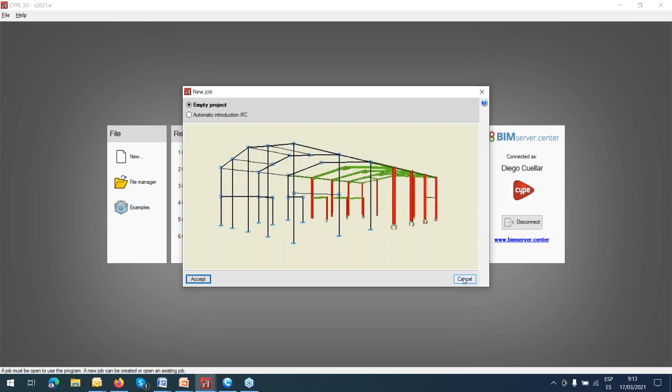Well, you can start with the empty example, or if you have any IFC files, you can start with that. I'm going to do it with the empty example. This part I'll talk about later. Accept it. Okay, so from now on, you're going to work in the 3D environment.

But the first thing is, if you want to introduce a node, for example a new one, the cursor checks everything, any connections, any cross section. You can click here, and now you'll see one little node here. That point, the numbers go by default.

And for the next ones, if I want something on top, you have this extension that lets you create the height of the second node in the z direction. And every node has two conditions: external fixity and internal fixity.

External means that it's supposed, in the near future, to have something connected with the soil. So that connection could be one of these options. In this case, I'm going to introduce fixity one.

That means that displacements are fixed in x and y and z. Also the rotations are fixed. There are several options, but for this case I'm going to continue with this selection. So that's the way we right away understand that this is the fixed connection. And the one on top, if you click on top, you displace it.

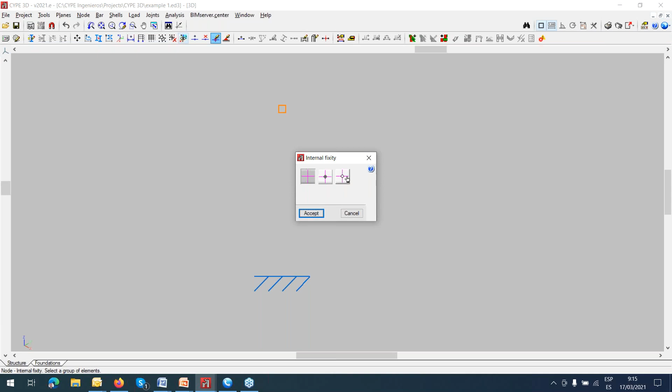And internal fixity is another joint on top, and that one on top also has different connections. It could be the fixed one, could be the fixed node with partial fixity, or maybe one that you can create on your own. So that's it, it's a fixed node on top.

The second part is just to introduce any bar you want, a new one. From this place, you can create a new bar. By default, the program displays this kind of bar, and then we have several options here. We can start with the generic ones.

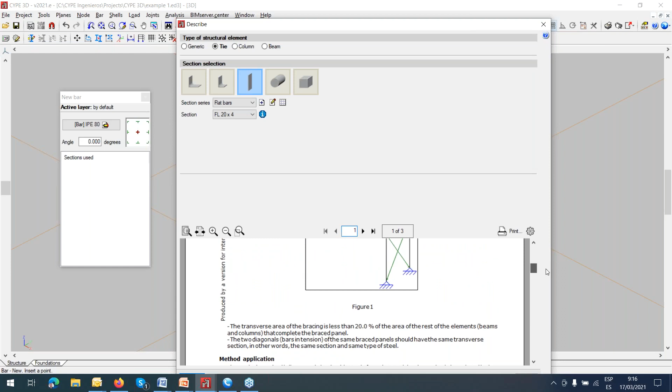If perhaps you want to need the tie, select this. Later on, if you need more information about this particular way of solving the problems, you get this extra information. Also, this kind of bar has to be working in tension, it's not allowed to work otherwise. If the bar is able to work in tension always, that means the structure has a solution.

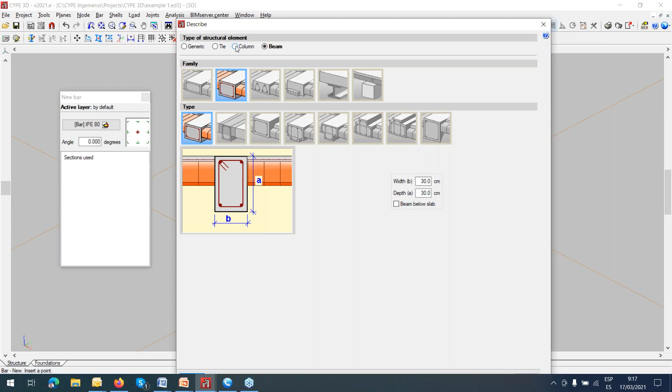And also the last two buttons, the columns and beams - recently, a few years ago, we started working in 3D with columns and beams in concrete. You can also work with different combinations, not only the metallic ones - you can introduce timber, aluminium, or concrete structures as well.

What is the difference? Sometimes people ask me what is the difference between these concrete ones and the last two. In these generic ones, the concrete columns or concrete bars don't show the reinforcements. But with the column and beam option, once you define the analysis and finish it, you will get that information.

So suppose we want to continue with this kind of rolled steel sections. Over here in this grid, you have other options - there are some factories that give us extra information regarding all the products they offer, and they post it here in the program. Some of them are from Spain, some from America.

Depending on who is watching this conference, in the future if you have any factory information and the full details, you can send it to us and we can introduce it here.

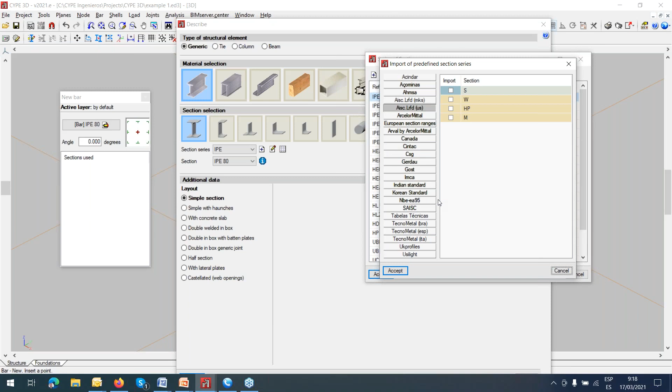Continue with this - you just choose one of them, accept it, and you will display that option later. Once you are working, you may find something not here, maybe in the next profile - for example, that one shows something in red. That red mark means this profile is not available for you, but it doesn't mean you cannot introduce it.

In this section, you can also develop any other profiles that you already have in your local town, and introduce them here by hand. Okay, so this is it.

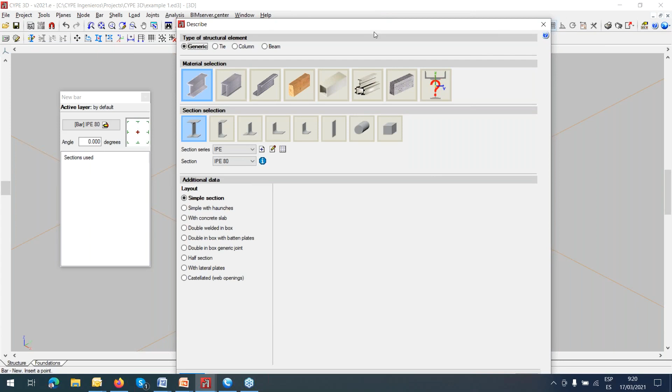So I'm going to introduce the first one, this kind of profile, the IPE. Accept it. This is in case you want to check the fire resistance.

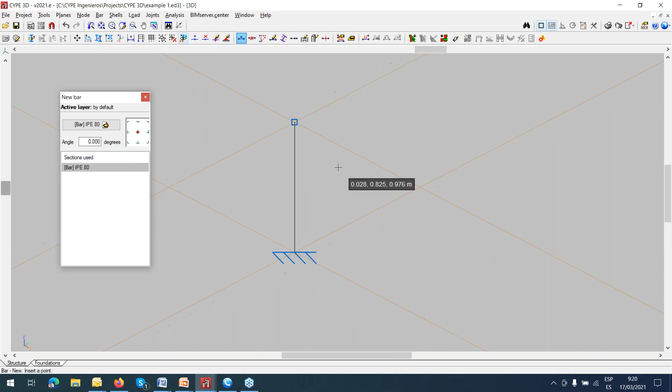Then you can click from here up to here, and now you have the beam, right? So the first thing you're going to display is this over here. On this side, you have the global reference - the global reference is different from the local reference. If you click here...

Later, if you want to display the bar, for example to describe the bar, you'll see that the reference is completely different. So you should know this from the beginning, because now I'm going to show you the forces or load case scenarios that we can introduce in the bar.

We can introduce the joint - you can introduce any force in any joints, on top and the bottom. You can introduce several options, and once you define these options, you have to make a reference - it could be the global reference or a particular reference like this one.

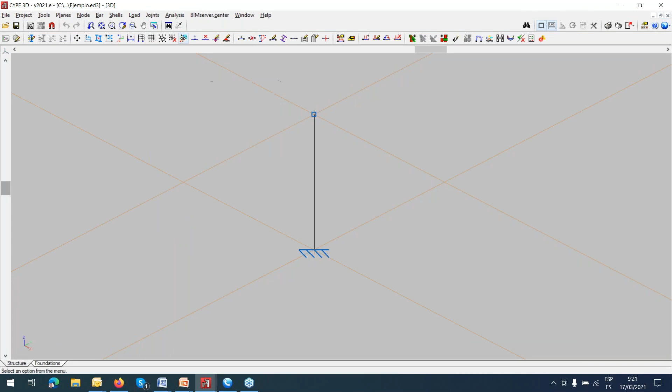Let me show you the examples because I already had one. So we have now the load case scenarios. I'm going to display all of them. We have several cases - the self weight, Q1, Q2, Q3, and Q4. If I select view all, we get this, right?

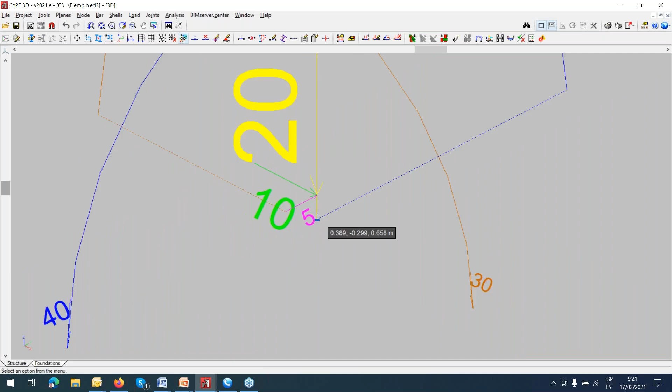Okay, now the scale isn't good enough, maybe it's too high. Now go back to the load - you can modify the scales. Maybe here we can introduce 0.1, 0.1 everywhere.

Let me check. 0.1. I'm going to reduce the scale a little bit. Accept it. Now it's okay. We're getting better.

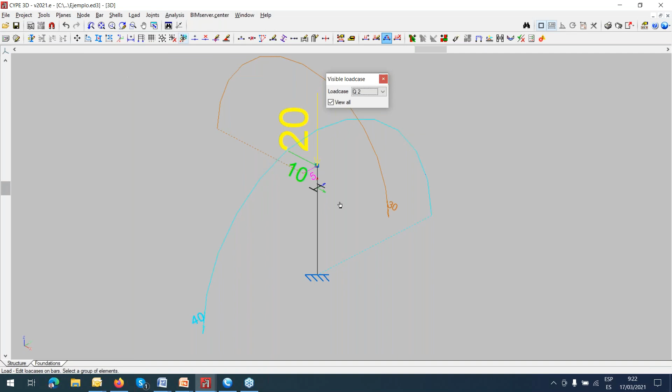So now, just to show you how to introduce the loads in the bar, just click in the bar. You can display all of them. So if we go back, for example, to edit the forces on the bar, if I click here...

If I click, for example, the self one. I'm sorry, I made a mistake. Let me fix it, please.

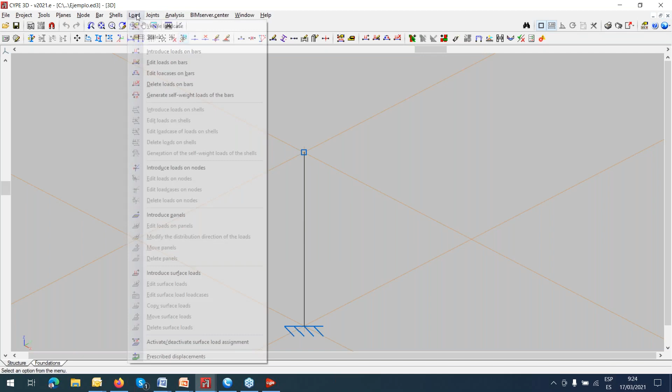Okay, that one. So we go back to the loads, edit the load case of the bar.

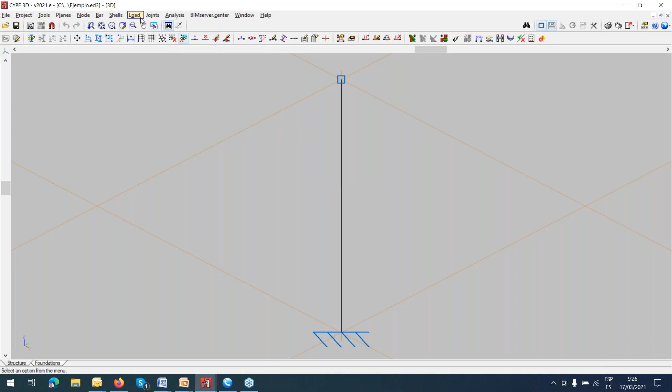Oh my goodness, sorry. I'm sorry, guys. Okay, going back to what we started. So I'm going to edit the load cases. And perhaps what I need is to... oh my goodness, why? It's another example, no, Diego? If it's giving you an error and all that. No, I don't know why it's showing this. Maybe you are using another standard, no? I mean, don't open all the time the same one if it doesn't work. No, I need to show that once and all. Let me finish. All right.

So we have several options here, each of them different. Suppose this option, for example, if I click in the load case, you will have a force for Q1, for example, in a different location.

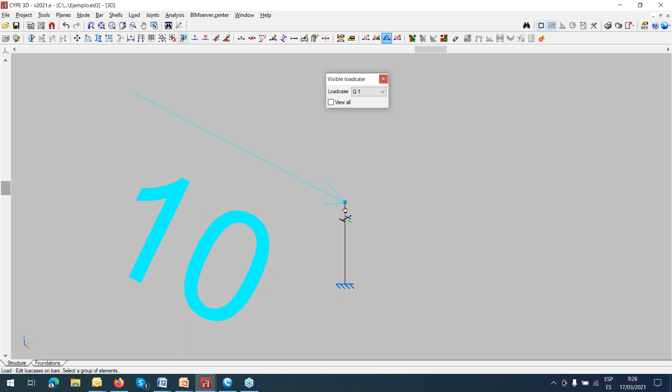I'm introducing a force on top of the node of about 10 tons. The Q number 2 is about 5 tons. Case 3 is a moment, a flexion in the Y direction. And Q4 is another moment, but in this case it's a relative location, in the bottom of the column.

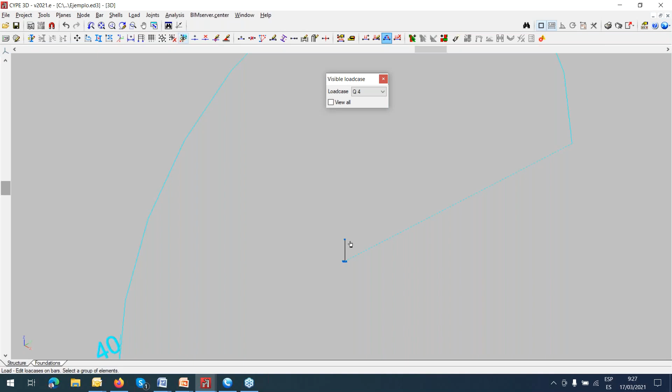Now I'm going to show you how to introduce this hypothesis in the program. So we go for general information, back to the additional load cases. Before that, I need to create that information in the software.

So we go for the live load. I did it for Q 1, Q 2, and Q 4. If I display everyone, you have extra information regarding that. If you need it, you just display that here. And also on the bottom, you have the combination. That combination, I can show you the combinations we are doing. So that's the combinations, and accept it.

Not only that, but every load we are creating here, you can do it with wind, any condition in wind, also for earthquakes, and also for snow, soil pressure, any accidental force. But the basic ones are the self weight, the dead load, and live load as well. In this case, I'm introducing the live load case scenario.

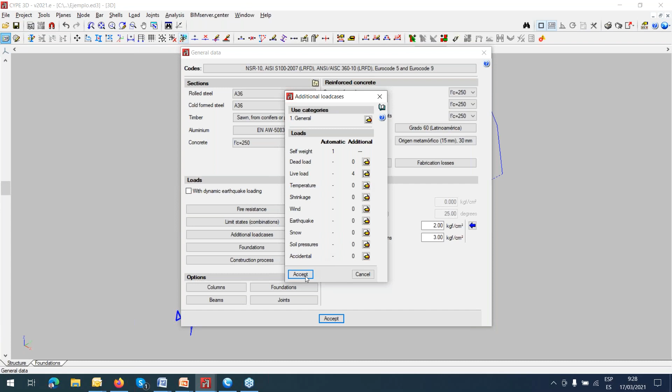Now I'm going to show you another project. Let me see. A simple beam. In a simple beam, we already have the analysis. When you display the analysis and you have color here in the icons, it means the analysis is done.

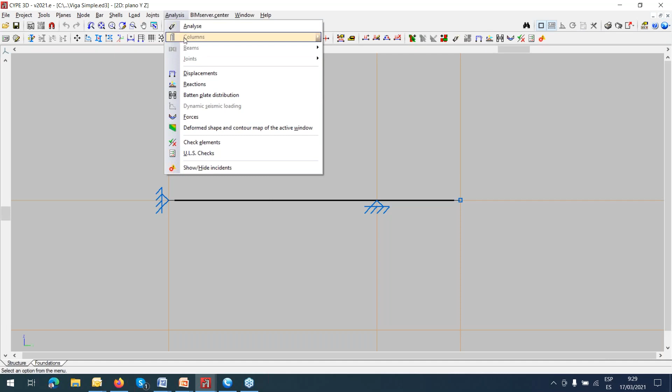The first thing I want to see is the loads. I'm going to show the visible ones, or show you all of them, and also the loads, and you can edit, for example, Q 1, the self weight, dead load, and another case. Any of them, you right click your mouse, and you can display the load descriptions.

This is a point load. That one is the uniform load that we're using right now. That's the applied moment. Also, we can apply an increase of temperature. The last one is an increase in variable temperature.

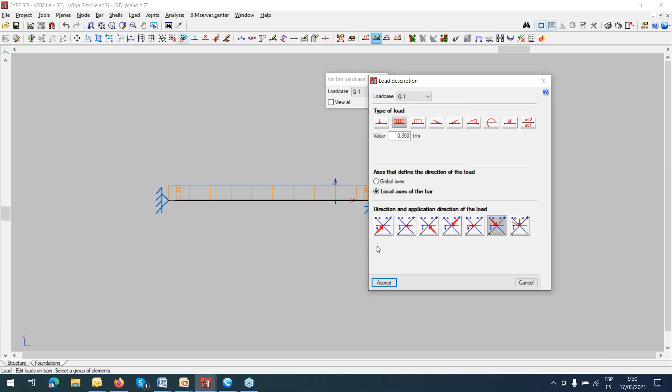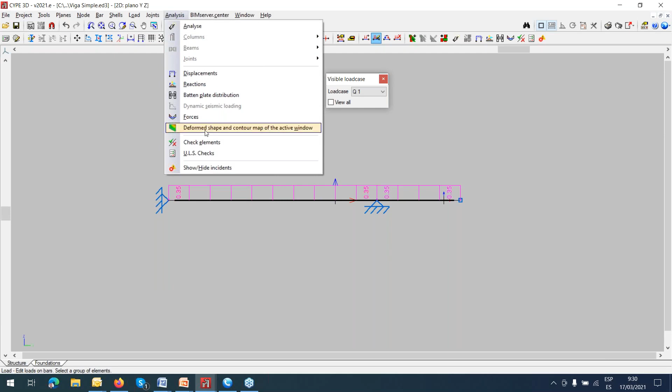So when this is done, I can create, for example, the state limits of the bar. You click, and you can check everywhere according to the resistance. As you know, the solicitations are the reactions, the shears, and the bending. And about the deformations, we have the torsion or twist, the elastic deformations, and the maximum deformations.

This check gives you details here one by one. The only thing that's not here is the deflection. I'll show you later about that kind of deflection.

Over here at the top right, you have the full report regarding that beam. You can go around, check any normative. I will show you later about the normative.

And also, for the second analysis, you can visualize the deformation of the bar. I'm going to introduce the profile, turn it around a little bit, and increase the scale by 500.

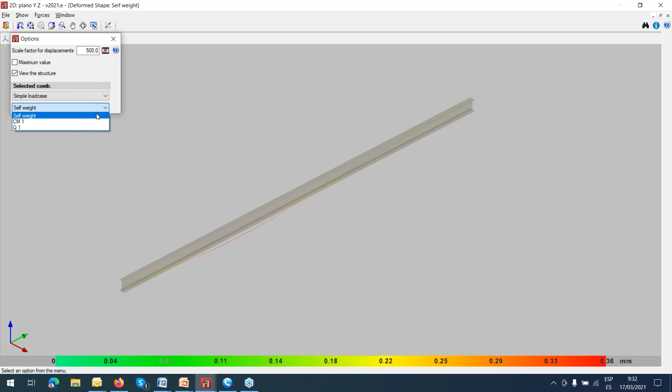Now on the bottom, you can select the combinations: could be the simple loadcases, the displacements, and that's all. The other ones are for different elements, but the simple case could be the self weight or dead load, and also the live load. If you want to see really how the structure is moving, click here and you will see it right away. If everything is okay, this is one way to check if the structure behaves the way we are expecting, so that's a good reference first.

Then, for example, going to check for the displacements. For the displacement, we have several combinations. In this case, we have several combinations, and I'll show you for this combination what we have. It's something like that.

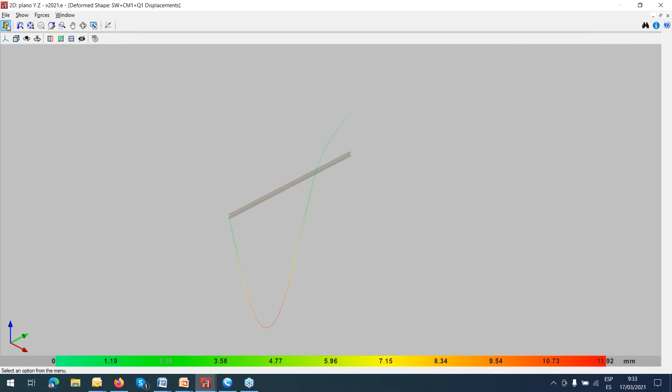Beside that, we go back to the profile. Remember that I was talking about the bar, and there is something called the buckling, the lateral buckling. Lateral buckling could be for this side or the other one. In this case, the lateral buckling for this one is selected this way, but remember that for the upper flange, you must choose this distance LB, and also the spacing.

If this bar is located in the rafter of the warehouse, you must be aware of the distance between the purlins, and that distance is tricky to introduce. For example, if the rafter is 1.5 meters on top, it's better to introduce that distance because that's the restriction. This is a very key option that you must understand right away, especially when doing a warehouse and you want to check the structure properly. If you don't do so, perhaps the structure is going to be over designed and also not cost effective.

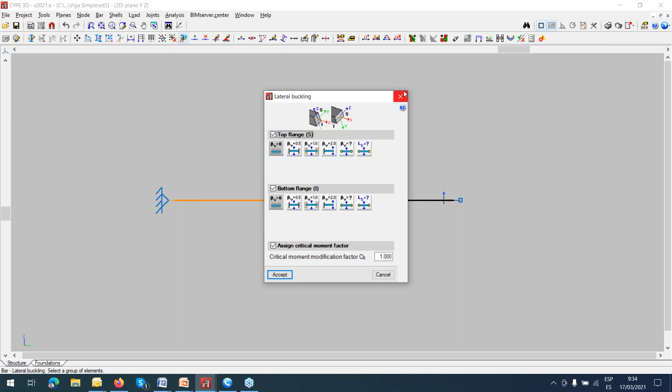Beside that, we have the bar and also the limiting definitions. For example, in this case, you must understand the deflection: suppose if the beam is not very slender, it doesn't comply by deflection.

We must set up these things right away. That's the limit deflection that doesn't show in the check document that I showed you before, because this is separate. You gotta understand that if you display this, you have some default numbers, but the relative maximum deflection goes by the normative, and you must check the normative.

As an example, if you choose L divided by 500, it means you are using very poor, low quality partition walls, but if you go for L over 400, it means you are using poor walls, something like that. The quality of the elements you are going to use comes exactly from the code or code reference. Normally this limit, the relative maximum deflection, goes between L over 250 or L over 300, more or less. Okay, that's the maximum deflection.

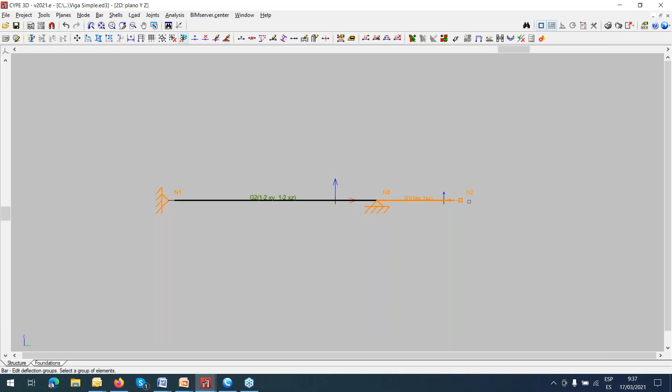Now I'm going to edit the group, for example. In this group, in this site, from this point N1 and N2, you have the sequence. For the last one, which is free at the top, the last part, this is a tangent. The definition is a tangent, and the reference is point number one. Point number one is this one. Okay, you gotta be careful with this.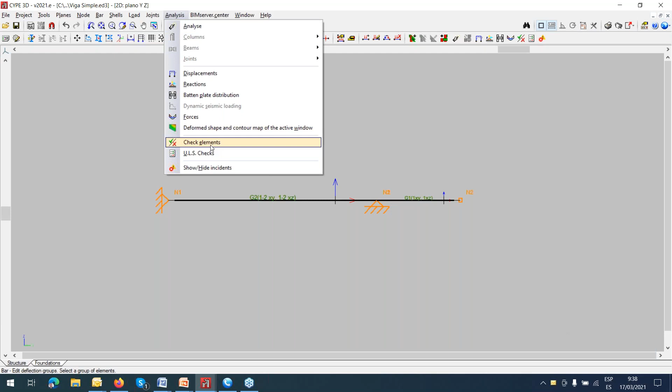So once you run the analysis about this small beam, you can check also the element. Click here, we already did that. Now for the analysis, we go for the check element.

Click here, and it will display exactly where you are. So we are using the IPE 180, but you can get it all lower. That means that according to the load case scenario it's okay, more than okay, but also on the right side you have the percentage of use. You've got to be careful about the weight. If you want to save money in the company, you must go for the lower one maybe, and you will be safe. The same thing for the other bar.

All right, so now we go for another example. Maybe I'm missing something. Now we go for forces.

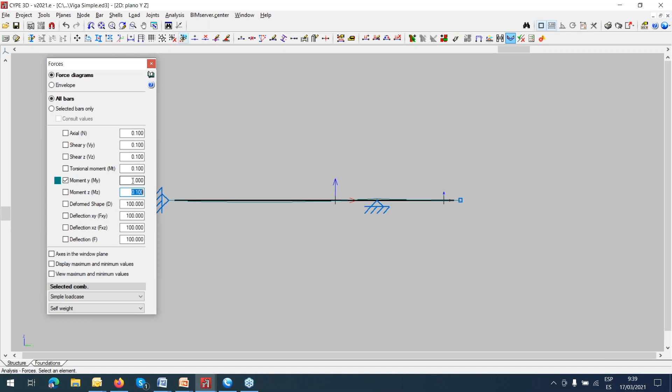Here, you can see, just to show you here, this part - not in here, maybe the scale is not good. Maybe I'm going to increase maybe one, maybe 10. Okay, good. So now you can see the deformation.

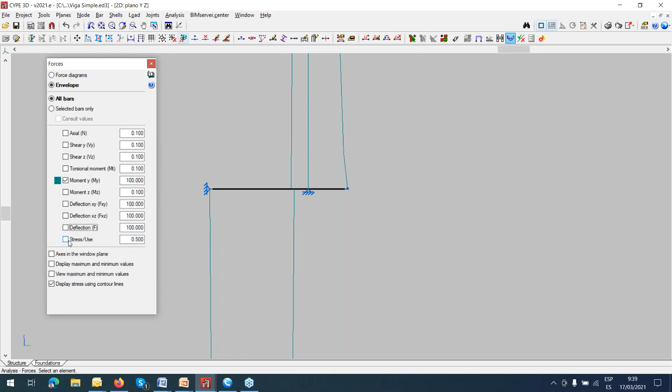You want to do the deflections over here. If you want to check the overload, now you have the deflections. You have the stress, which I have mentioned before.

Now, if you apply the second law, any force that you are applying in any element, if that element has a mass, you are also creating an acceleration or inertia in that structure. What the reaction means is the tension that you are creating in that bar. So that's the way to see or check that tension in the bar.

Okay, I think this is it. We can go back to the analysis.

Now maybe you might need the reactions in the bar. Click on one of them and you will see the displacements and information regarding that knot, the second knot. The last one is not okay because it's not supported by any external fixity. In this case we are using knot number one with external fixity, and at the second point we are using external fixity in the bar, and from all of them we have different cases.

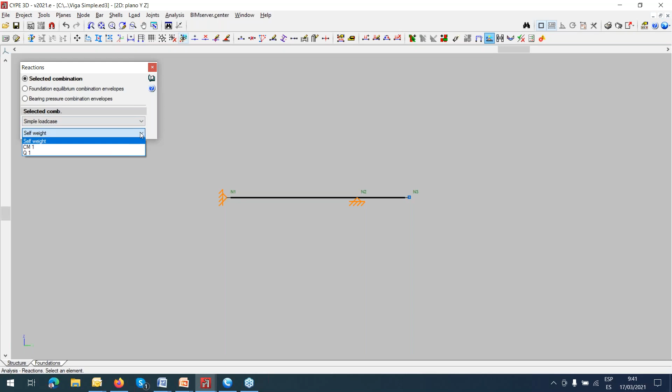For the self weight, also for the dead load, you see we are having some numbers here in the reaction in zeta, and also for the live load, creating a different environment. That's the way to check it.

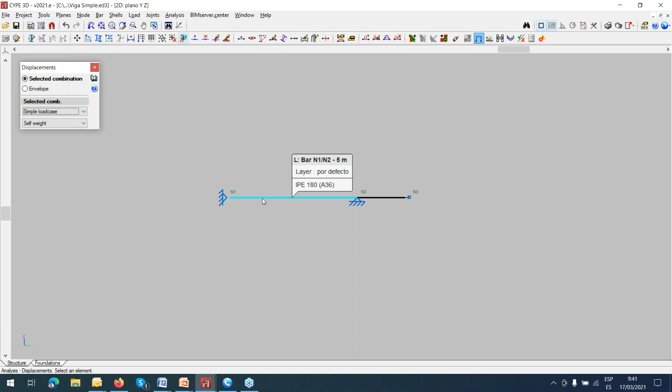And now in the analysis we can display also the displacements if we have that kind of displacement. The same thing here, and for the overload, which is going to be more important.

Now I want to show you another example, which is the buckling. Okay, for the buckling...

We go here to bar and check the buckling. I'm going to check the buckling here. So about the buckling, it's almost the same. You can work with these coefficients. As you know, the formula is L equals beta...

by the distance. But you can use the beta, the simple one, but you must also check the coactions. Depending on the coaction, you can use the beta. If it's not the case, you can introduce the length. With the length, you can start doing the analysis.

Sometimes when you are working in a warehouse, one of the laterals of the warehouse is going to be supported by different elements - could be more than one element, one column, more than one column - but in between columns you can start working with walls.

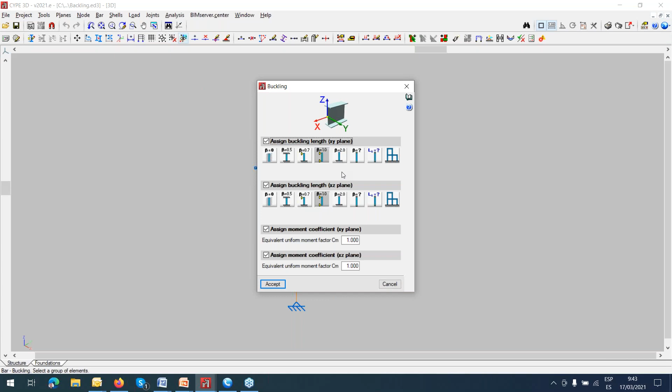Those walls - the way to recreate that wall is when you are using the right buckling. You don't need to start introducing that wall in the software, but using this information properly, you are recreating that restriction in that direction. Okay, I think this is it.

Well, the same thing - the load case for this particular structure, we have several ones. We have three cases: one load in that area, one load in the center at this point, and one load a little farther from this.

So you can study what's going on with one of them, and this software is usually helpful if you are a professor at the university level. Could be nice for you to use it and try to recreate different scenarios.

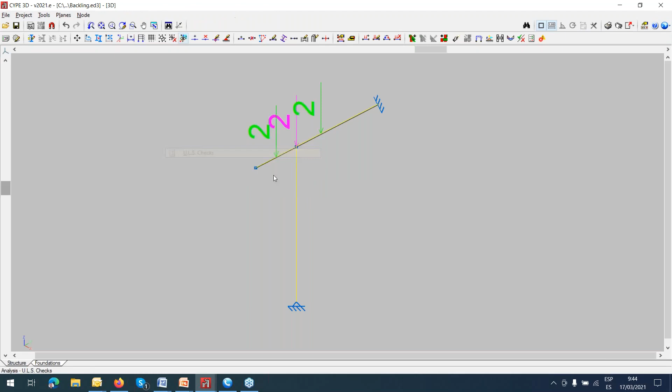So the analysis is the same thing. You can check any bar, and you will see the code check depending on the code. Now we are using the Eurocode. In this case, you're watching the Eurocode, but any combinations, any solicitation, any deformation that we might have, you can check if everything is okay. If it's not okay, you will have it marked in red or in a different color than green, and you can check the reference, go to the article, read more about the problem, and perhaps with this extra information, you can go back and do modifications to the structure.

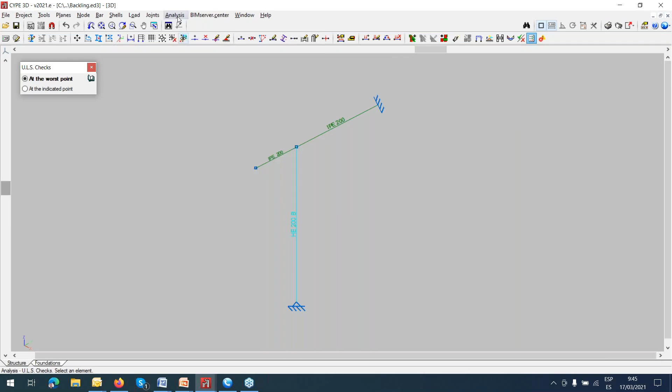I'm going to show you the deformation, for example by the P2, P1, which is more important. No, it doesn't. Let me show you more. I'm going to increase this value, 200 perhaps. Yeah, 200 is okay, so perhaps you can see it properly.

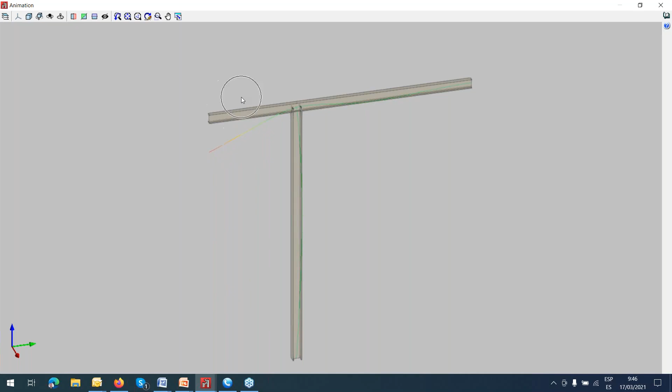I'm just checking what is happening with this P1 load. P1 load is in this bar over here, affecting the structure this way. I'm going to show you the second point, P2. Nothing happened here, because it's over here. The P2 is affecting this part.

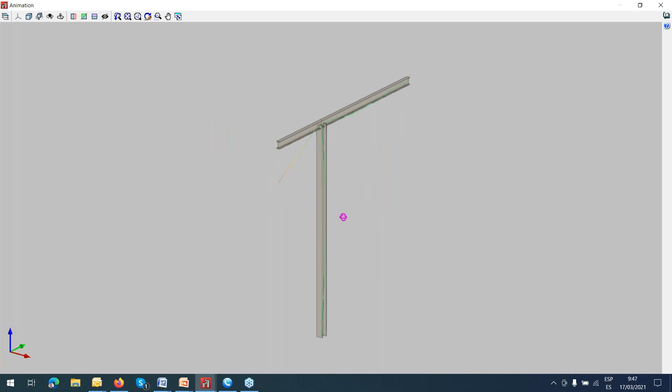And the last one, which is P3, affects it a little bit, not too much. So I think the worst case scenario is the one on the corner, and that's why we can see the deflection right away. Also, you can do it by displacements, and you have different hypotheses here. Now we can see the deformation shape, which is really important to check how the structure behaves.

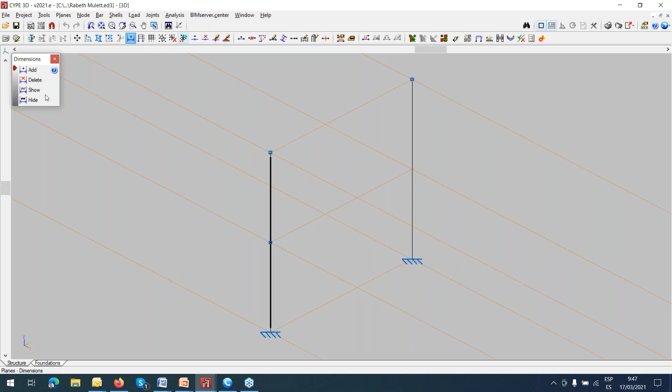Okay, now we go back here to a different case. All right, so I want to show you first the plane, the dimensions of that structure, which is like this, it's 6 meters. It's the same profile, but we have something different here, which is the knot in the middle.

That knot in the middle creates different behavior in the structure. So if you go for the loads, for the analysis, I'm going to show first the bar buckling. This is my option right now, according to the reactions on both sides, in the XY plane and also in the X-zeta plane. This is the option in this case. But in the second bar, even though it's the same profile, the buckling I'm choosing is different, and the solutions are different as well.

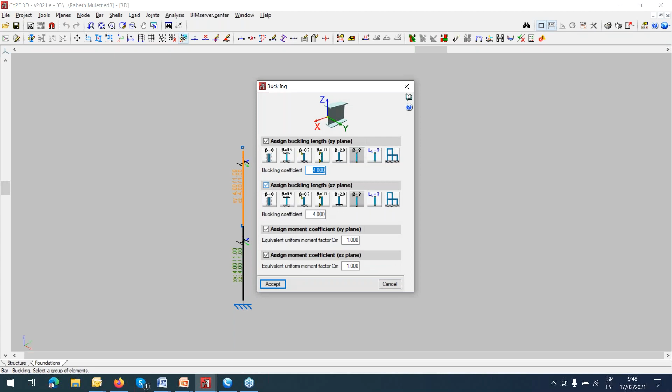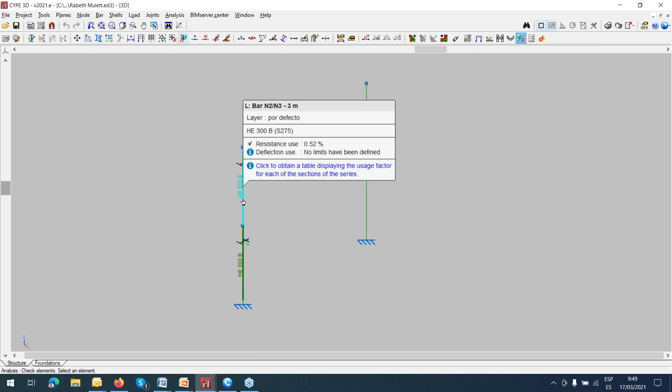Now I'm going to show you the check element. Look, the difference in the code checks is like this: the resistance is going to be 1.01%, which is the percentage for use. But for the second piece, we get different results. At the bottom, it's almost the same, but the weight changed a lot. And on top, even with the same element, the resistance or percentage of weight changes a lot. So it's very important to define properly that buckling coefficient.

So now we go to the tower. This is an electrical tower. Sometimes it's better... right now I'm working with an astronomical observatory, and I finished it recently. I did it with this program, CYPE 3D. I'm not using a different program, just CYPE 3D, and it's really complex, but you manage to finish the job. In this particular case, which is really important, I'm going to show you in 3D.

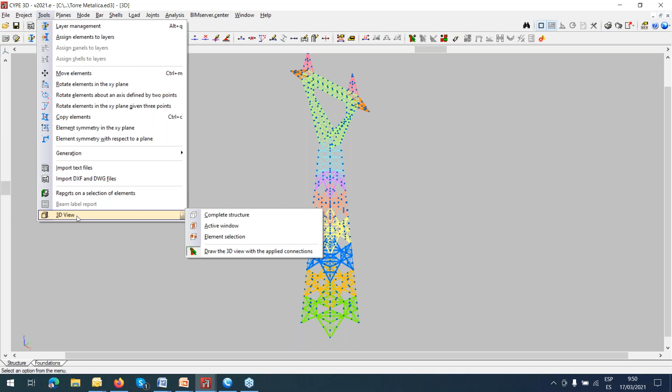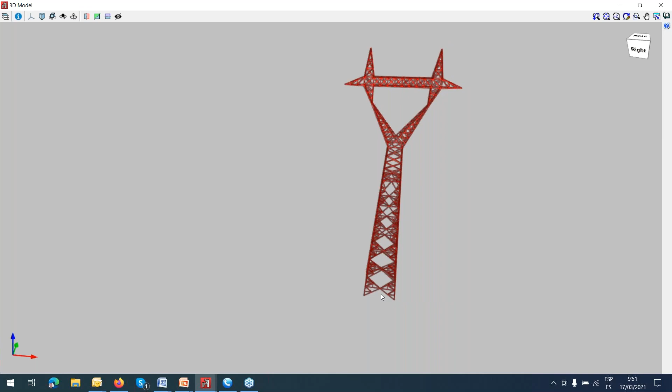It's really complex to do it, so it's better to start the job in another software, could be a CAD program, and then you can modify it or bring this information into our software. Could be in 3D, or you can also introduce something in 2D. After that, we can start working with different profiles. I'm not going to do it, but it's possible.

Now I'm going to show you something different, which is the load case scenario. Remember that in project and general data, we have options for additional load cases. In my case, for this job, which is available for you when you display the examples, you have five wind cases. Usually when doing analysis of wind, you have to introduce it in the positive X direction and the negative direction. So here, as you can see on top, you have one direction called A, positive and negative, another direction called B, positive and negative, and the last one is the wind in front of the structure of the warehouse.

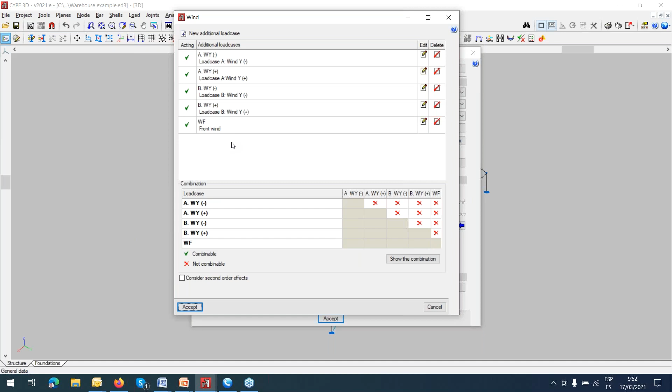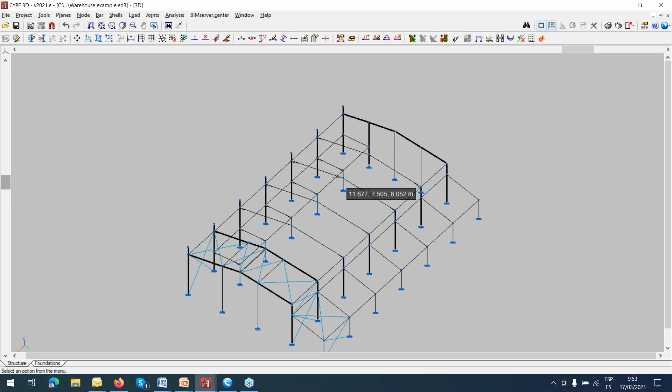On the bottom, the combinations - I'm not going to show that part. On top, we have a live load, just one case scenario. Eventually, remember we were using load case scenarios in just one bar. You can use the bar, you can use loads on the node, and you can introduce any deflections anywhere in the bar. That's why this example works well when we look at the load case scenario.

So now I can display all the things I showed you in the hypothesis before - you can display all of them here. I'm going to show you just the first one. It goes like this because of the direction - you go on the bottom and check the direction. There's an arrow here showing that the wind is going from the right side to the left side.

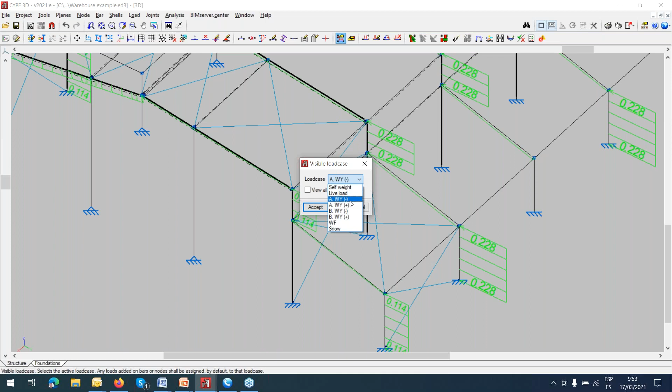Another one, I'm going to go. Another one could be the positive one - it says negative, positive now. The positive one is different. The person who did that did it first. He knows the values and did it by hand, bar by bar.

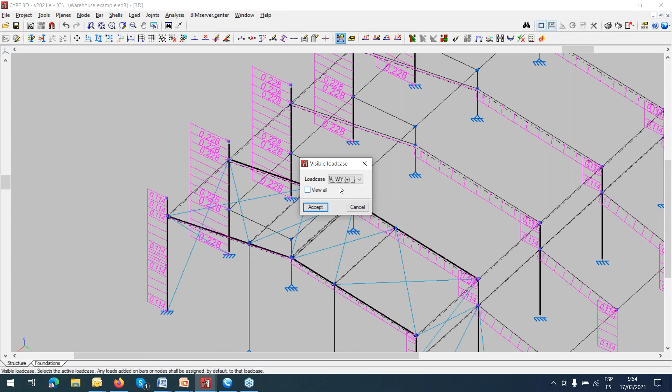The last one, maybe the one in front - that's the load in front of the warehouse. Something nice to see is the snow, the effect of the snow on top of the roof of the warehouse.

We also have a different kind of load we haven't talked about. In this software, we are using nodes, bars, and also shells. With shells, I finished the observatory astronomic example, which I'll show you later.

So now we can introduce a panel or a surface load. If I'm going to do a panel, I use this part here. I click here. You must select the frame - you can avoid the last point by right-clicking the button.

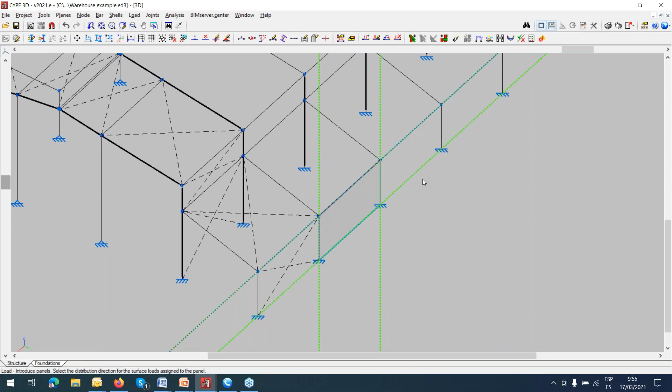The best way to introduce it is, suppose the wind is coming from right to left, or any direction - it's better to show that these winds are going to displace differently. The way I study the effect of that wind on the structure is up to me. Suppose I choose this direction - now you see any effect of this wind will be distributed in these two bars. Then I can start using different kinds of options here.

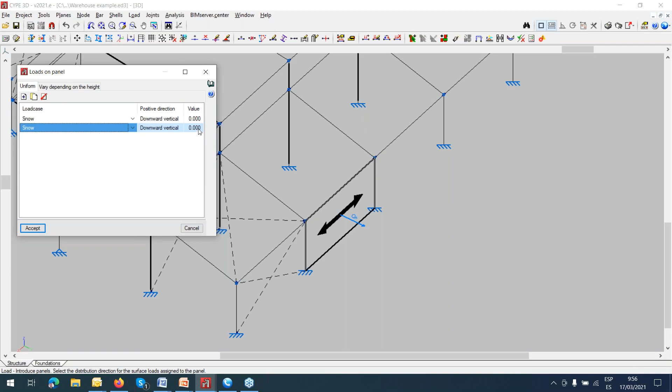If it's a new one, I can introduce a new one, not only the reference one, and give any value here. After that, if you run the analysis, you'll see that the displacements and solicitations in that area change or modify drastically.

Then I have another option here, which is the warehouse. This warehouse is in the manual - I did it in the manual. You go back here and do the example, display the 3D example, and you will have this structure. It's not in there, but I did it because it's a good example to understand the software better.

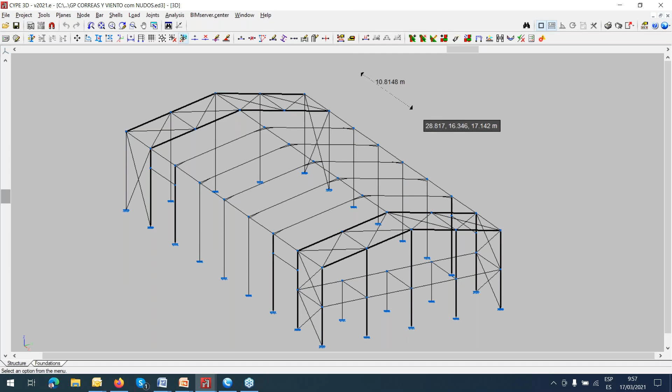What I'm trying to show you is that in front - well, I forgot to tell you that the best way to work in the software is to create windows. Windows means that in this option you are working in 3D, like you're watching right now, but I can create different options in 2D sections about this element, this structure, and also any horizontal area.

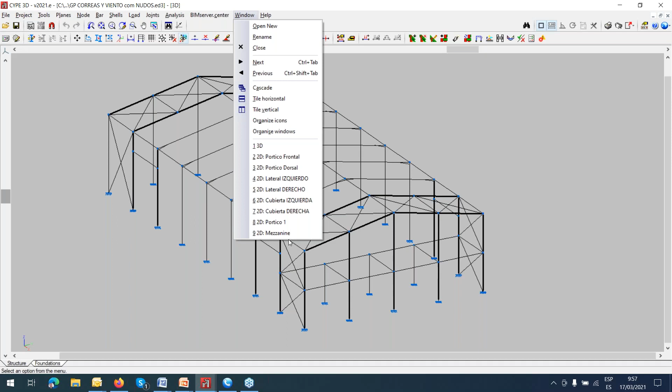The mezzanine is this part over here. If I want to view it, I just create the sections, and every load I'm trying to display for you, you can see it. If it's something here, you will see it right now - that's the load we are considering in that part. Perhaps this is the office where people work, or maybe you store heavy materials, but that's the way to do it.

So we go back to the windows, perhaps the frontal frame. Imagine that's all the load case scenarios, even the winds and also the dead load and live load. But remember, going back in time, this is how the software started doing it.

This software was originally called Metal 3D. Later, they changed it to CYPE 3D. At that time, they were thinking about solving warehouses.

So they came out with something very particular about how to introduce wind loads properly. If you check one of them, there are so many that it's difficult to introduce by hand.

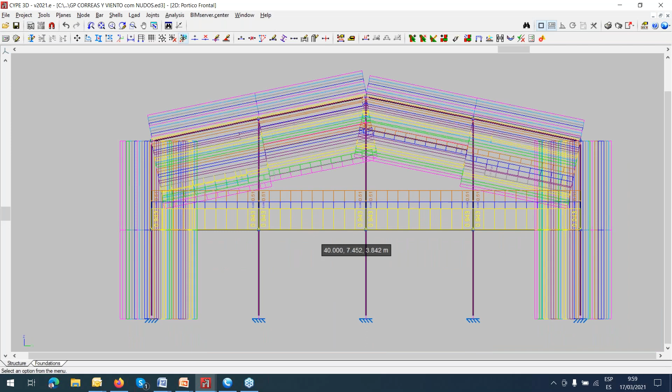So we have an extra software called the portal frame generator that allows you to introduce just the first frame, like you're watching right now. From that software you introduce all the details about the dimensions and things that are really important regarding the load case scenario, if people are going to work on top, if you're going to have snow, or if the structure is going to be really open.

The software can also, by default, define the purlins according to all the information you're introducing. Beside that, it gives you the opportunity to take the report about those purlins separately.

You don't have to introduce those purlins in the structure from now on, because once you finish, you're going to introduce the portals into the CYPE 3D environment. You have only the possible elements you're going to have in CYPE 3D, but from now on, you can start introducing all the profile elements that are going to constitute the structure. At the same time, by default you get all these live loads, dead loads, and wind loads automatically. It's really important.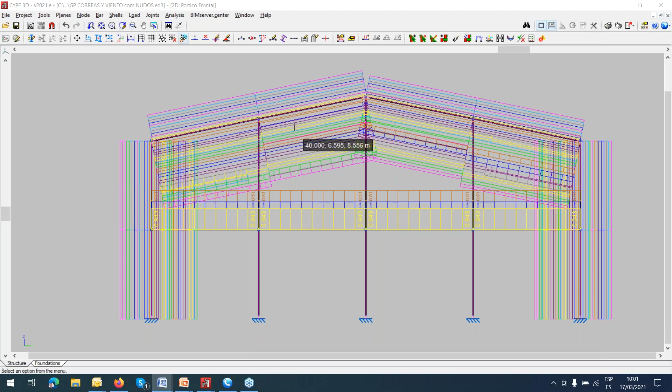Finish with the normative, finish with the code, finish with your load case scenario, and then once you're inside CYPE 3D, you can delete the left side of the house, delete all the live loads and wind loads on that left side, and continue the analysis about the marquee. Okay, that's another way to use the software.

So I have here, maybe that one, the portal frame generator. This is just a quick demonstration because we only have one hour, but later, if we arrange the possibility, we'll show you more details about the portal frame generator.

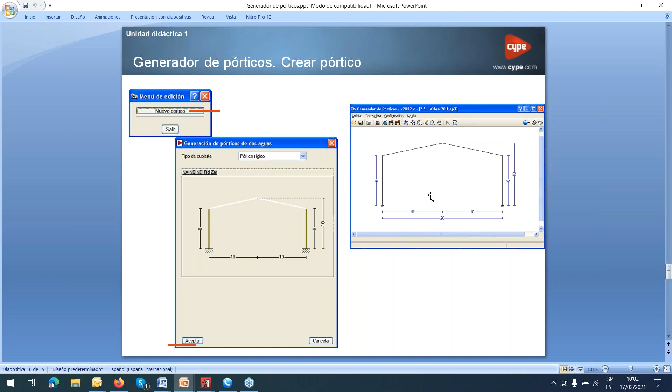But now, because we're running out of time, I'll show you right away. You have to choose the new portal in the software, then introduce the geometry of the frame I already showed you, and it will display like this. Then you'll be able to analyze the purlins on top, and you can also use lateral purlins.

Beside that, it gives you the deflections according to the limit already used in the analysis. Remember, this is a very normal way to express these values: L over 250 or L over 300 is more or less the usual way. Also, on the description of purlins, you can start with something else.

You can start with these kinds of profiles. Once you choose one of these buttons, the program will check according to the load case scenario which purlins fulfill the requirements. Once that's done, you can go to the second step, which is the separation, or the distance between purlins, and create any one you might need.

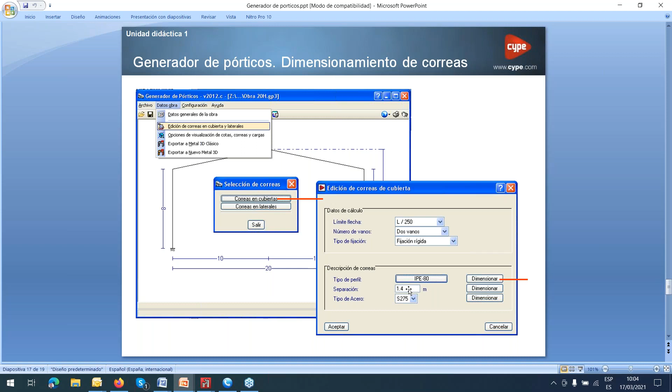The program itself checks what is the best distance between purlins. When you finish with that part, it gives you a full report on how the profile is working in the structure, along with this kind of documentation. The last step just shows which kind of visualization options you'll have after finishing with this software.

Once you are in CYPE3D, you'll be able to define if the first portal behaves the same way as the last one, or something in between. Between portals, you can create some kind of working together—if you modify one of the elements, the middle portals will be affected as well. But it depends, and I prefer not to do so; I prefer to keep a few determinations about this selection separate. Then, once you're in CYPE3D, it's pretty easy to do whatever you want.

That's the case, and I have another thing to show you, because sometimes we forgot to talk about how to call the interactions between software.

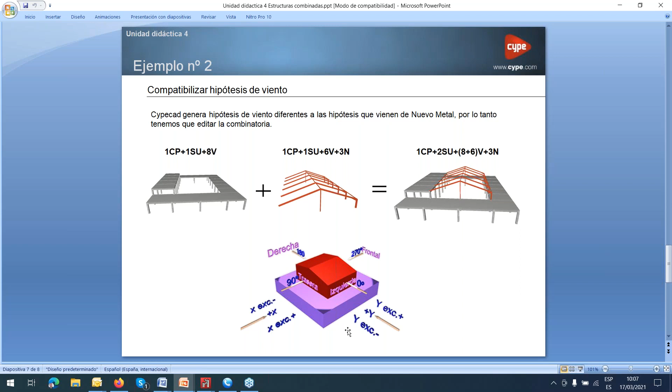All right. There is some difference: if you have one place, if you have the warehouse just in one level, that means we have only one selection. But if one side of the structure has a different level, you must take care of this before exporting that in CYPECAD.

So one of the best ways to do it is you have to select one side of the structure, fix it connected, and the other one freely. For example, if I choose this part here freely, that means zero connection. I'll show you later. The second part, on the right side, will be fixed connection. And then once you are in CYPECAD, you have to define that this connection has to be fixed.

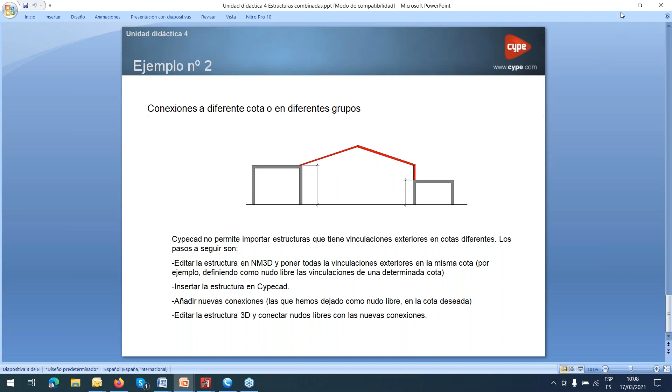That's the solution. All right, so we go back to the 3D view. You see this very messy job is well done using the portal frame generator, and it's pretty interesting that you have everything done in seconds.

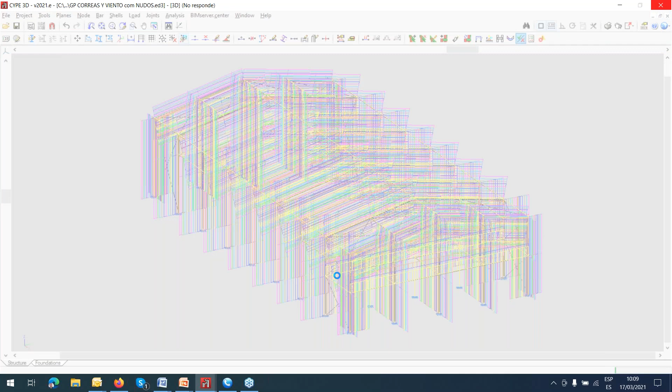Now just to see perhaps the check element... well, it's going to take time... so we go back here. Meanwhile, the last thing that I want to show you is the job that I'm working with.

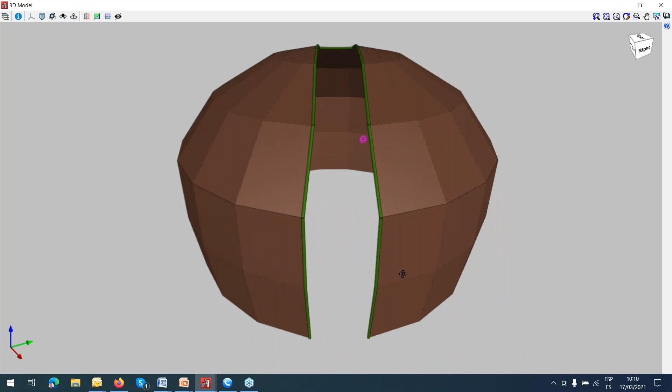Okay, this is the job. I'll show you in 3D, I think it's the best way. So that's the observatory, an astronomical observatory, and we did it inside 3D. It's pretty nice, a little complex, but it's possible to do so.

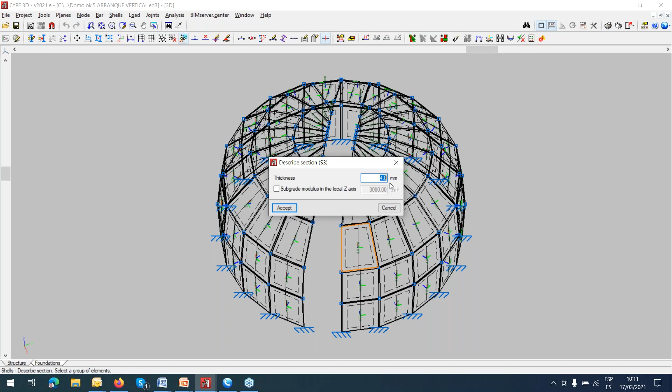Once you finish with this, it is called a shell. The gray color means shells, and for these shells I'm going to describe the section of one of them: the thickness is 4 millimeters. You want to create a new one, a new shell. It could be concrete, you can use steel, you can cold form steel, you could also use aluminium or any generic one.

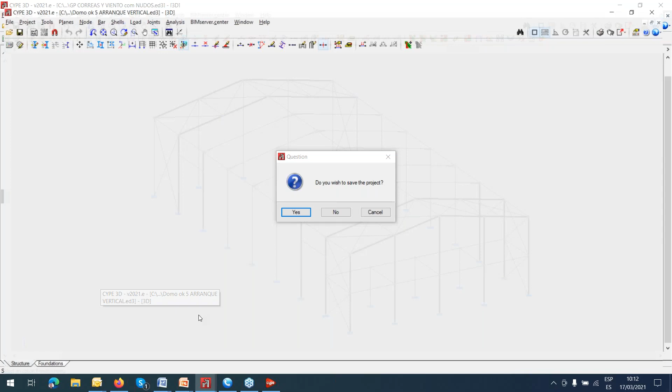So I think the best way to see it, to visualize the job, is if I open what I did in CYPECAD. I'm going to close all these. I'm going to open CYPECAD. Take a little while, don't worry.

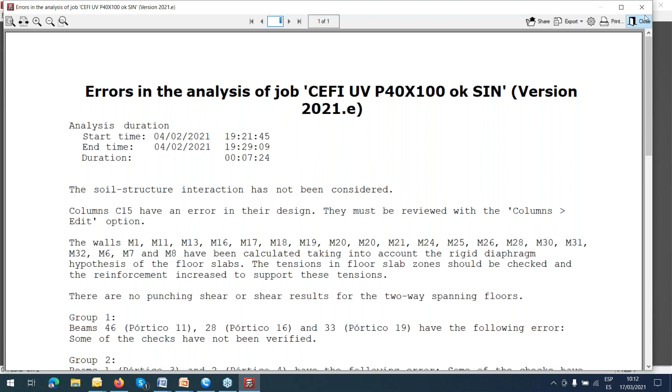So, okay, that's the same structure, I can display that structure on top of this building. So this is one way to use the 3D interaction between structures, and it's pretty cool. You will see all the effects; you can introduce the wind effect inside 3D, then here.